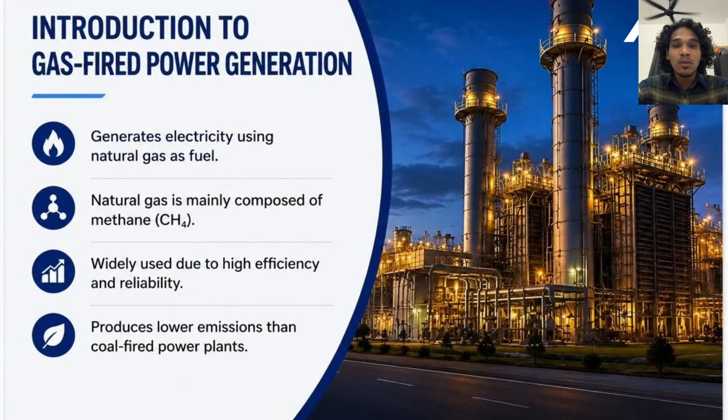Gas-fired power plants play a critical role in the modern energy sector by providing a reliable supply of electricity to support homes, industries, businesses, and cities. They help meet the growing global demand for electricity while maintaining efficient and dependable power generation. Their widespread use around the world demonstrates their importance in supporting economic growth and modern development. Because of their reliability, efficiency, and comparatively lower environmental effect, gas-fired power generation continues to be an important part of today's energy mix. With this introduction, let us now move on to understand the operation and basic principle of a gas-fired power plant.

Hello everyone, today I will explain the basic construction and working principle of a gas-fired power generation system. The system converts the chemical energy of natural gas into electrical energy through several important stages.

Firstly, air intake: air is drawn into the system through the air intake. Filters remove dust and moisture to ensure clean air enters the power plant. Next, the clean air enters the compressor, which increases the air pressure, improving the efficiency of the combustion process.

Next, combustion chamber: the compressed air is mixed with natural gas in the combustion chamber. This mixture is ignited, producing high temperature and high pressure gases. Next, gas turbine: these hot gases flow through the gas turbine, and the force of the gases causes the turbine blades to rotate, converting thermal energy into mechanical energy.

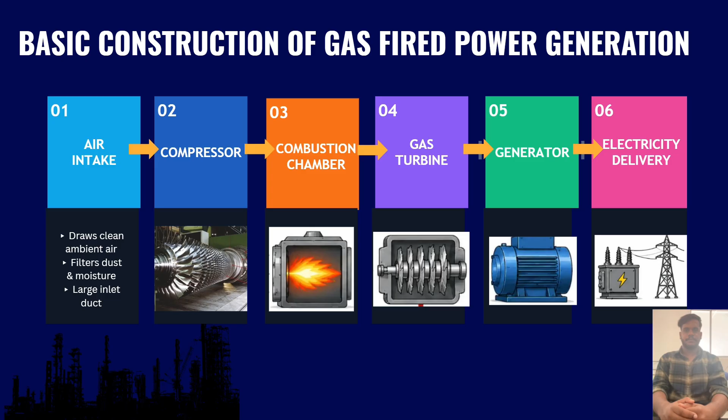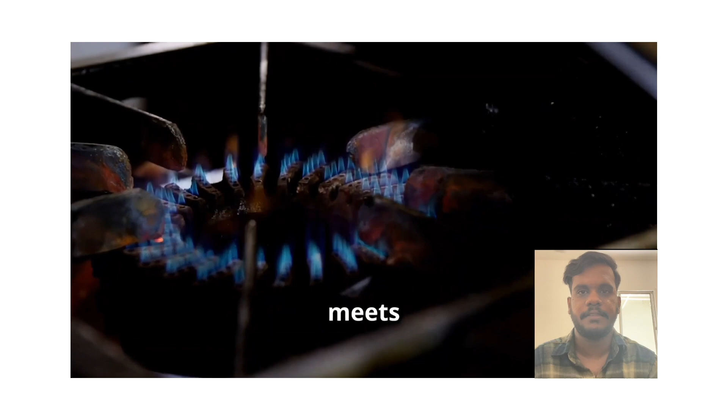The process begins with the compressor sucking in vast quantities of air and squeezing it tightly. This compressed air then flows into the combustion chamber where it meets the fuel. The mixture is ignited, creating an intense inferno of hot, expanding gases. Imagine a controlled explosion that releases tremendous energy.

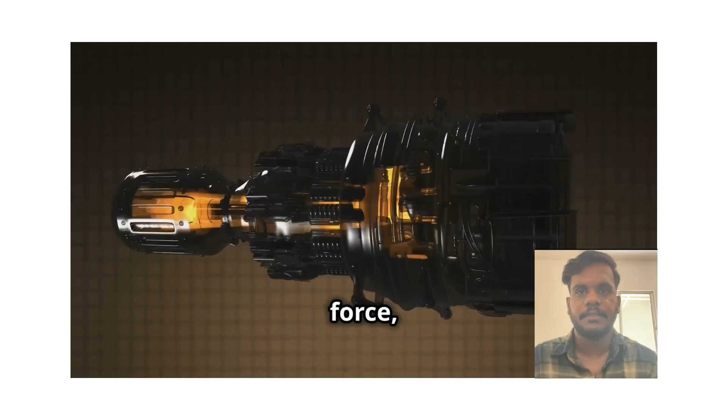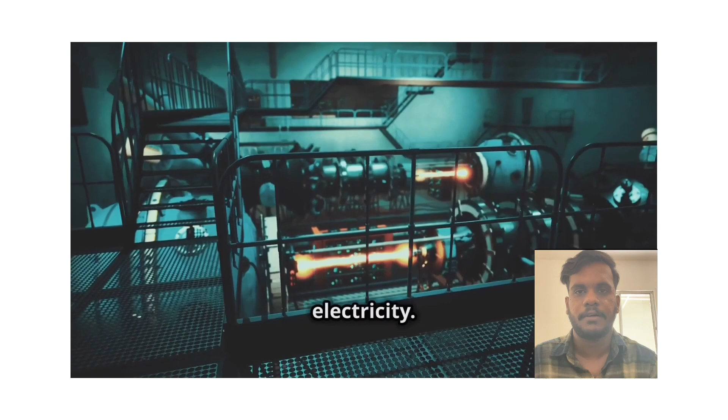These gases then rush through the turbine, pushing against its blades with incredible force. This spinning, rotational energy is what drives the generator connected to the turbine. As the generator spins, it creates the flow of electrons that we call electricity. This electricity is then distributed through power lines to our homes, schools, and businesses.

Now I would like to explain how a gas turbine works. A gas turbine converts the energy of burning gas into mechanical rotating energy. Firstly, air intake: air is drawn in from the outside into the compressor. The next stage is compression: the compressor pressurizes the air into a high pressure.

After that, in the combustion chamber, the fuel is injected and burned. The hot gas expands and flows through the turbine. Then the gas turns the turbine blades, producing power. Finally, the exhaust gases are released into the atmosphere.

Next, I would like to show a short clip about a gas turbine.

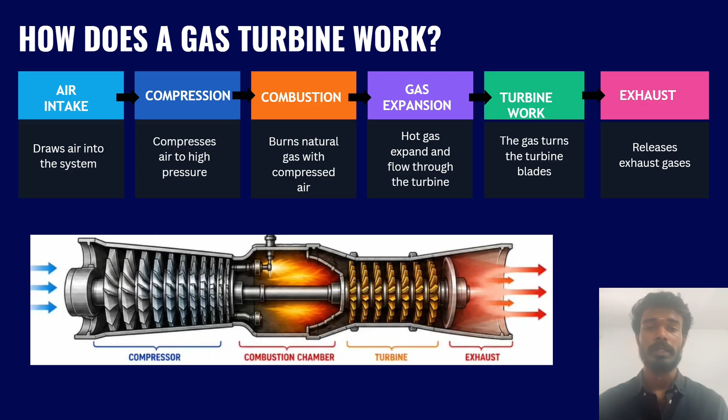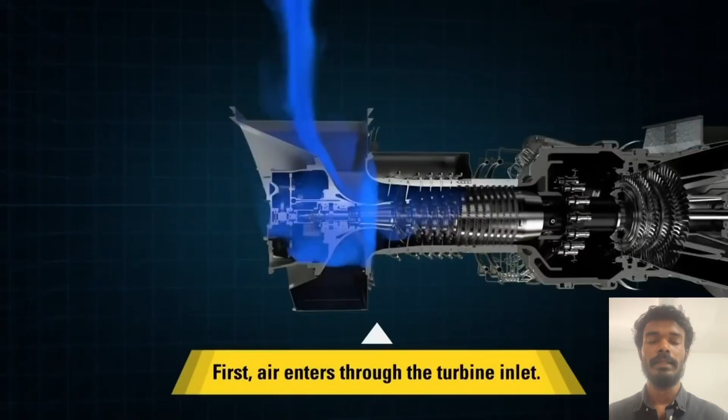So how does a gas turbine work? First, air enters through the turbine inlet. Next, the compressor increases the air pressure before it enters the combustion chamber. This compressed air is then mixed with fuel and ignited, creating an expanding hot gas. Finally, this hot gas drives the power turbine and generates mechanical energy.

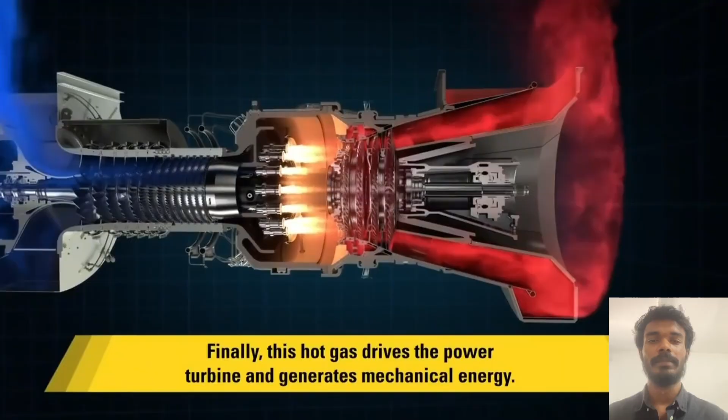I'm going to explain the basic principles of gas-fired electrical generation. To understand how gas power plants maximize energy output, engineers rely on a few foundational principles of physics and thermodynamics.

The thermodynamic cycles involved include the Brayton cycle, the ideal thermodynamic cycle for gas turbines. It involves isentropic compression, squeezing the air without heat loss, isobaric combustion, burning fuel at constant pressure, and isentropic expansion, extracting work through the turbine blade.

The second thermodynamic cycle is the Rankine cycle, used in the second half of a combined cycle gas turbine plant. It focuses on changing the phase of water from liquid to high pressure steam, expanding it through a turbine, and condensing it back to water to repeat the loop.

The entire operation is a chain of energy transformation, starting from chemical energy in the gas, transforming into thermal energy as fire, then into kinetic energy from the spinning blade, and lastly into electrical energy that can be used.

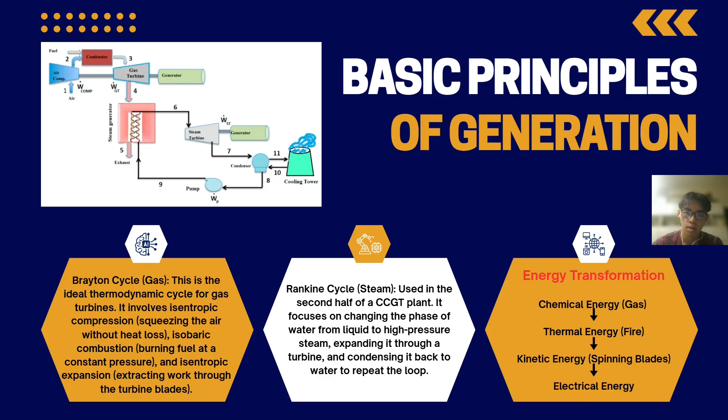Now I want to talk about efficiency and exergy destruction. First, for thermal efficiency, a standard simple cycle turbine converts roughly 35% to 40% of fuel chemical energy into electricity. Combined cycle plants push this boundary, achieving efficiency upward of 60%.

Second, exergy destruction. In thermodynamic terms, a huge amount of potential work, exergy, is destroyed during combustion because of the massive temperature difference between the flame and the air mixture. Keeping the turbine inlet temperature as high as metallurgically possible is key to minimizing this loss and keeping efficiency high.

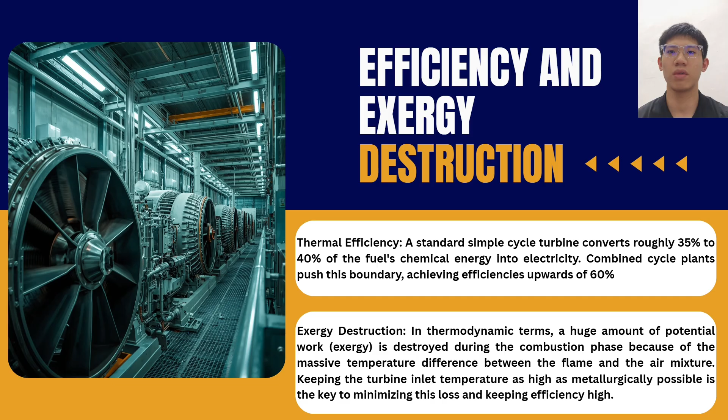First, we have the Track 4A Combined Cycle Power Project, located in Pasir Gudang, Johor, Malaysia. It contributes a total capacity of 1,440 megawatts of power, split into two identical 720 megawatt blocks operating on a single shaft configuration. Each block features an advanced General Electric 9HA.02 heavy-duty gas turbine acting as the primary mover.

To maximize efficiency, a horizontal heat recovery steam generator captures the exhaust heat, channeling it into a GE steam turbine to produce secondary power without burning extra fuel. Furthermore, Track 4A ensures strict grid security through dual fuel flexibility, relying on natural gas as its primary source and distillate oil fully integrated as a reliable backup.

For the second example, we have the Futtsu station located at Futtsu, Chiba, Japan. This is one of the largest and most advanced thermal power facilities in the world, with a staggering total capacity of 5,040 megawatts. Futtsu station achieved this massive output using four distinct groups of advanced combined cycle units, leveraging cutting-edge turbine technologies, deploying both GE frame 9HA turbines and Mitsubishi advanced MACC systems.